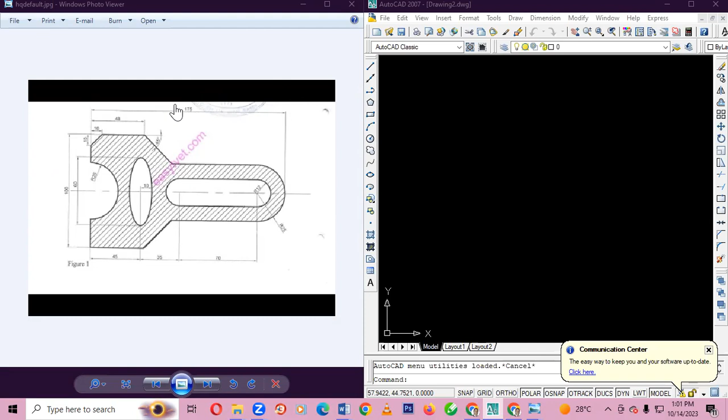It's a bit complicated, but when you understand the basic foundation of basic drawings, you can now move to the other types of shapes needed in this case. Remember, this is a 2D diagram that needs to be drawn using a combination of shapes.

You have already been taught how to use the line tool, circle tool, ellipse, and other dimensional styles. When you want to start a drawing, first you need to locate your starting point, which is a point where you can easily locate the flow of the diagram despite any challenges.

So in this case, we'll start from this particular point. When you look at it, the line is moving from this point to this point. We'll start by first analyzing: it's 45 from this point to this point, but remember at the top here it's 48. So there's a small portion left outside, which is 3, and this 3 will complete this line.

Then from this point here, we have from here up to here, which is 35. To locate this point from here to here, you need to understand the measurements and the way they have been applied. Without understanding the measurements and how they've been applied, it becomes difficult to interpret. So here, this particular point is 35 from this point.

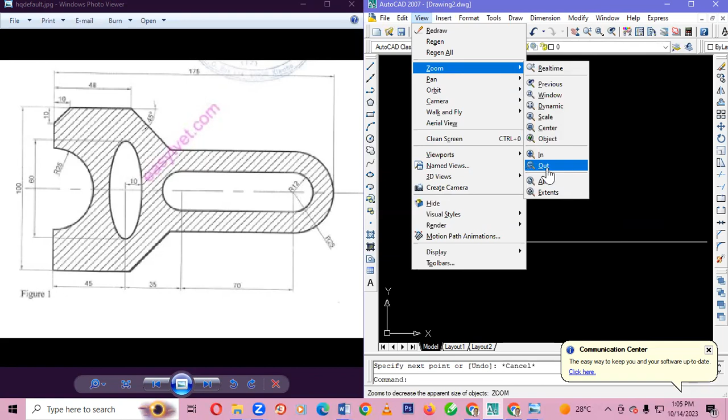When you escape, the line measurement is very huge, so to resize the line you need to click View, go to Zoom, then choose Zoom Out. In that case, you can still repeat - just click View, then click Zoom, and zoom out like that, so the line becomes proportional to the diagram you want to draw.

This line was 45, but we said from this point to this point it was 48. So for you to apply 48, you need to subtract 48 minus 45, and the remaining portion here is 3.

So what you do is select another case: you point to the end point, click, then point to the direction where you want to move. You type 3, then tab 0, press Enter.

We have also explained the concept of how you can change this particular line. Remember, in our explanation they have not given the specific measurement for this line, but to identify the line we can use this particular point here.

So in this case, we have our 35. We also have 3 here in between. So this 3 we will subtract from 35, which will give us 32. And this 32, from this particular given point to this one, it will be 32.

But now remember, when you are drawing your circles here, we have applied the inner radius of the circle. So this particular given inner radius is 12. But now for us to apply the remaining portion here, it will be 12 also, so from this side to this side it will be 12. So we take 12, subtract from that 32, which will give us 20.

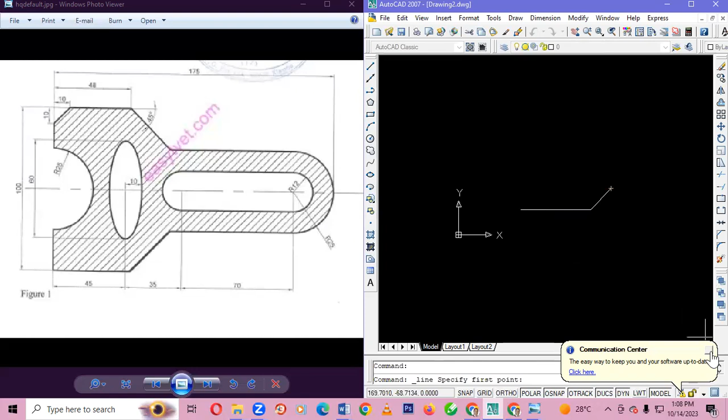So you just click on the line, then you point. But before you point, let us move it to the correct space where you can be able to see. So for you to move, you can also use Control A first, then choose Move Tool here. When you choose Move Tool, you can point, then move it to a space where you want to view that particular given case.

So once you move, now we can draw this line from here to here. We said 70 plus 12, which is the radius of this particular given shape. So you come and click, then you put here, and you can start by drawing 12. When you draw 12, then you press tab, which will be 0, enter. Then from 12, you can add 70 here, which will be 70, tab, let's say 0 — 0 is always on your left-hand side. So from there, you'll have located this particular given point.

So for you to complete this side, you'll need to have a line starting from here, going to the center. But remember, the distance between this line and this one, we can now use the measurements where we have from this particular given point to this one. You see, it was 100, it was 100 from this point to this point. But you remember, in this particular given shape, they have turned this small circle to be 25.

So this 25 is like the same as this one, the outer circle, which is also 25. So in this case, when you want to draw this particular given circle, the entire line, it will take us 50 from here to here. But now we'll come up with 25 first. We draw the inner circle and we draw the outer circle.

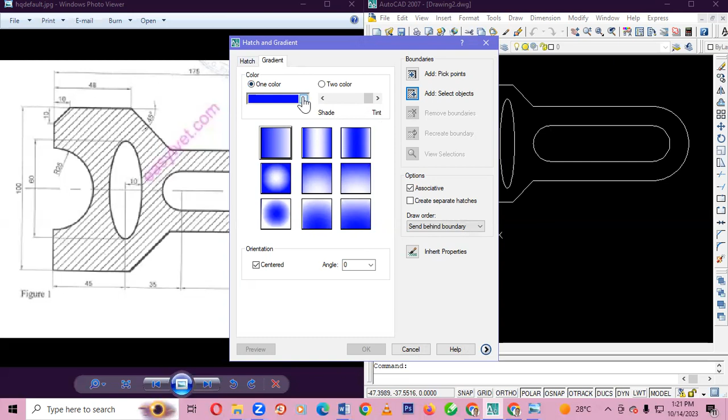Index, you select white, then you click OK. So you come to add objects. Then you just select this, this, and this. Then you press enter and click OK, like this. Now you can also fill this one.

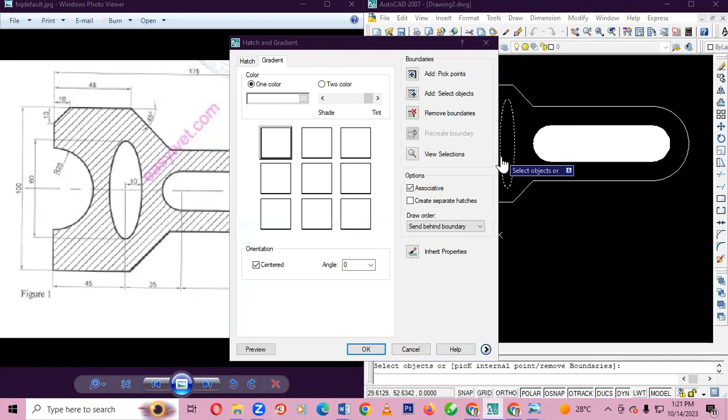You click gradient, then you select white, then you click add object. You select add object and press enter like this. From there you can apply a gradient on the other side here. So you select gradient here, then you choose one of the gradients and click OK.

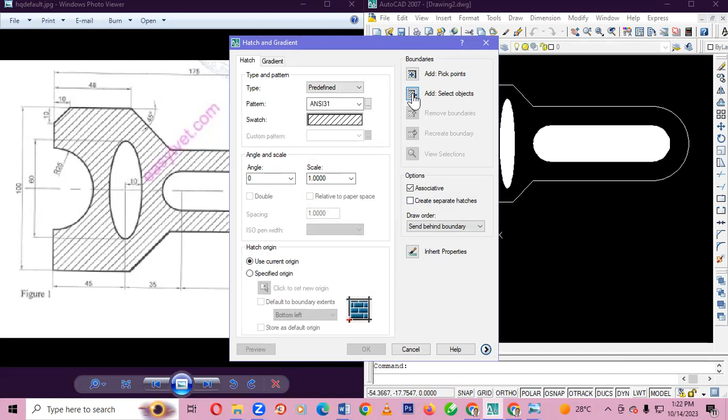Once you click OK, you'll be able to select one of these. So you come and select the objects that are needed here, like this. After selecting the objects, you press enter, then you click OK. For this shape, our scale is very small. That's why you are seeing it cannot fit.

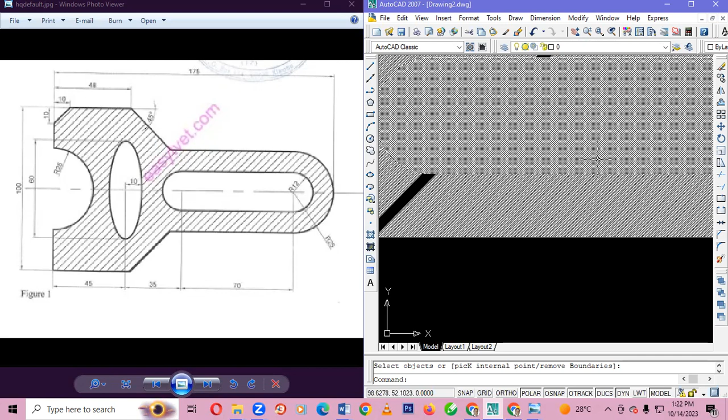So let us change the color of the inner shape here so that you can see it. To change the color, you just click here. Then you select one of the colors. You can click index and choose maybe blue. You click OK. Then you can add object here.

You select it like this. After selecting, you press enter, then you click OK. So this one will have a different shade. Also for this, just click gradient. Then you can click add object here. Add object, then you can select.

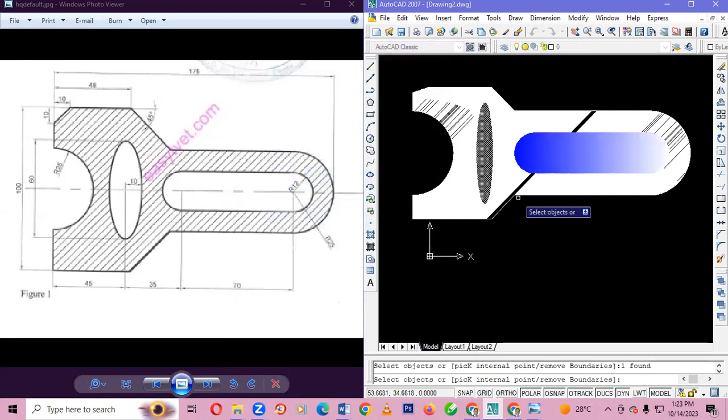Then you press what? Enter. You press enter. So I've said you just click gradient here. After clicking gradient, now you can select one. Then you click add objects. You select the objects, you press enter, then you click what? Okay, so that's how this particular given shape will be able to look like.

So in that case, once you have drawn that particular given shape, you can easily give the measurements. You can easily apply the dimension here. You choose a line. From here, you can choose the point where you can apply the lines and the point here, like this. So remember, I said before you apply the measurements, you go to dimension style. This dimension style, you go to dimension style, then you can just modify.

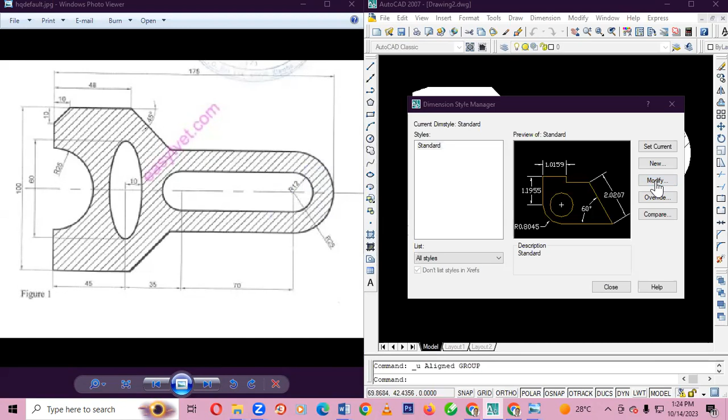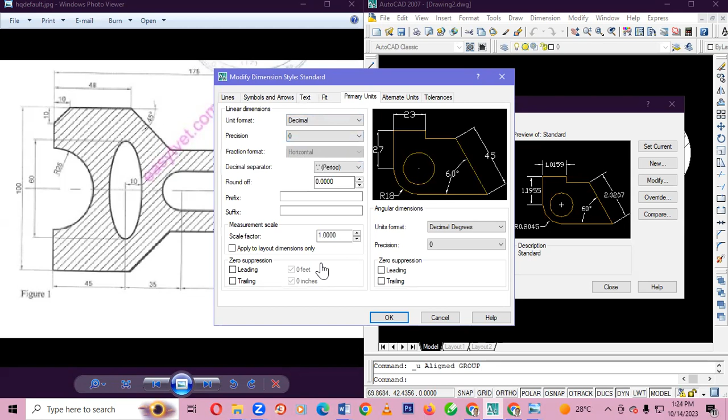From modify, now you can be able to choose what? Either line or symbols and arrows. So you just select in, you put it to be 3. You go to text, you put it to be maybe 4. You go to primary units here, you can make it to be zeros, like this. Then you click OK, like this. So once you click OK, you can close.

So if you go to dimension style here, you can choose aligned, then you can select one. You can start where you started drawing the shape. So you just click aligned, you select 1 up to here, like this. So that's how you'll be able to see. Then from there now we have radius, which you can also use dimension. You can choose a radius here. Then you apply it like this. So it will be 12.

So you choose dimension aligned. You are not seeing the measurements, but now when you look at it, you see 12 in that particular case. So you can just undo. So when you click this particular dimension, let me apply outside so that you can see. So you just click radius, you can select this, put it here. Then also dimension, radius. Yeah, then you select this, put it here, like this.

So from there now, when we want to apply this measurement, you choose dimension. Before you apply dimension, you just click here. Then you choose aligned. From there now you'll need first to draw a line to intersect these two points here, like this. Then you join at the top, so that when you apply your measurements, aligned here, you point at the top, then you point at the bottom, then you put it on the side that you want to apply, like this.

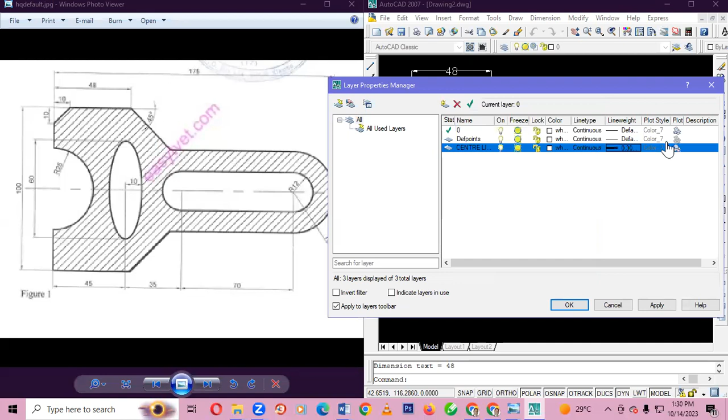After clicking OK, now we can also choose line color here. Then you pick one of the line colors and click OK. Once you're done, you can click OK. Now you'll have a layer of center line here. This layer of center line is where you'll be able to click, then apply the middle layer of this given line. When you click on it, automatically it will direct you.

In this case, when you select the layer line, first you need to have a starting point here. I'll have a line like this. This line will cut across up to this center here. But for me to apply at this center, I need to click the center line, then I'll be able to apply the line like this. When I zoom out, you can now switch to the one that you have modified here, which is this one.

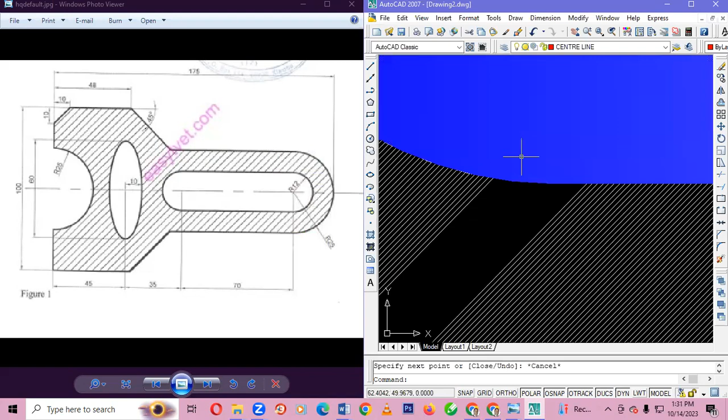Then you click on the line. When you click on the line, you start from the center, go to the circumference, then move it to the point where you want to apply it. When you maximize your shape, you'll be able to see that line. It depends on the scale. But if you choose the center line to be dotted, that's how you can view it.

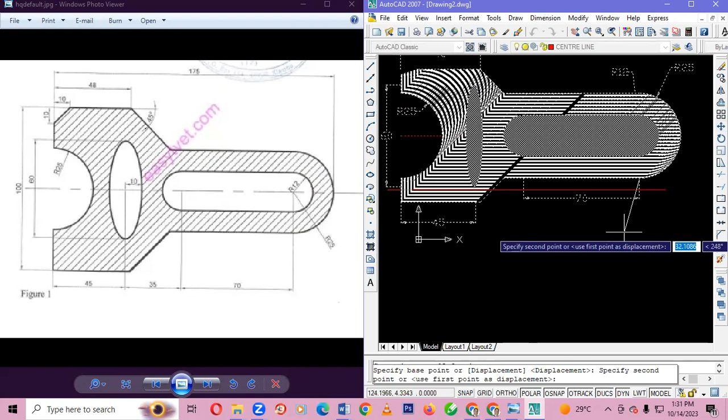You can move the shape down so that you can view it. You just hold Control A, then you choose the Move tool. When you choose the Move tool, you can move this shape like this. That's how you move the shape the way you like it to appear.

I've tried to explain a few concepts, but when we meet next class, diagrams will change from simple to complicated. So you need background information on how to interact with the tools so that you can work with them. So far, where we have reached, I'll share some diagrams so that you can check on them as you do your own personal revision. We have tried as much as possible to cover the class today. Any questions you may have, you can ask.

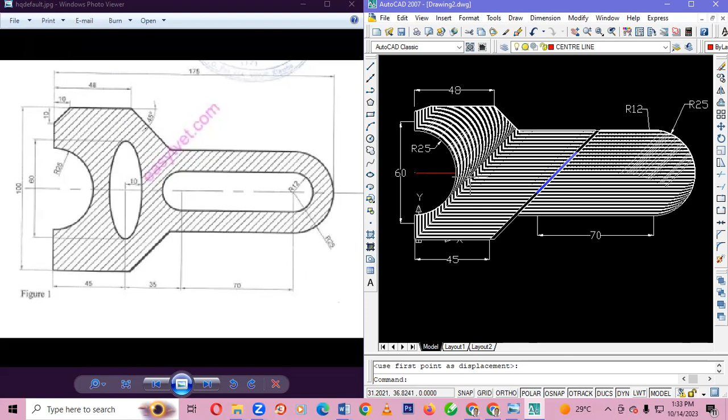Okay. Yes. But the diagonal, how did you get the diagonal? The diagonal lines, from the starting point. From the starting point, we have 45, then the 35. The first diagonal, we got it, the one at the top. The one at the bottom, the opposite of that. Yes.

This one I subtracted since we had 48 here and this was 45. So I need to subtract 45 from 48, which will be 3 here. Then this was 12. So the remaining portion here, I treated this line as from this point to this point. This was 32, since I subtracted 35 minus 3. So 32 minus 12 will be 20. Okay.

Let me share with you other diagrams to try to draw, and you'll be able to come up with many diagrams to draw as we continue.

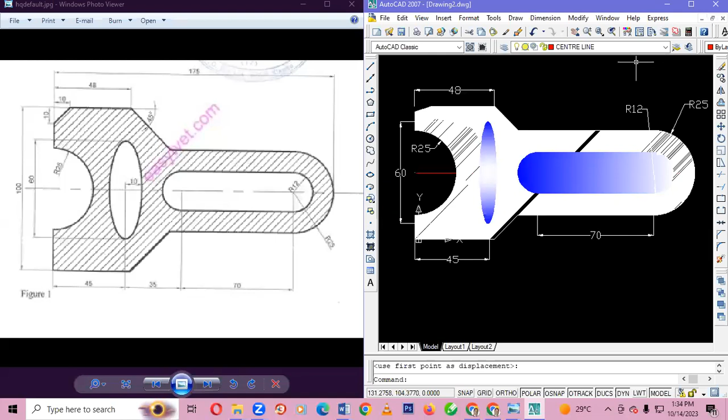So far, I thank you for committing yourself to the program you have been learning today. We'll meet next class on another diagram so that you can understand how to apply layers, how to apply different types of lines, and how to apply line weight. Have a nice day as you continue.